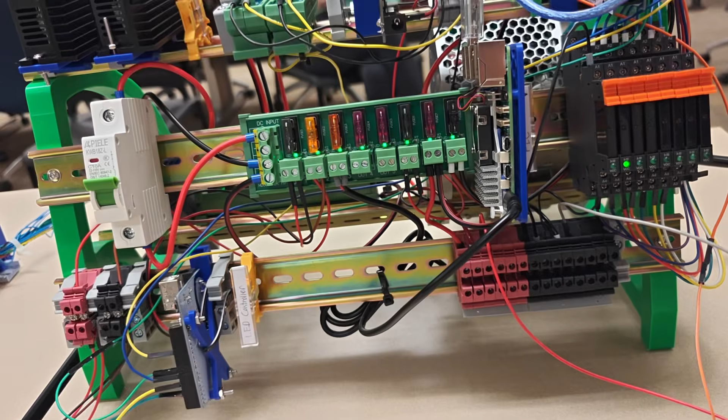We are the controls engineering team for the Themed Entertainment Association at Notre Dame, presenting Thunderbird's Tempest, a fully functional ride and show control system. This project utilizes real industry software and programming languages to safely control a swinging pirate ship-style model theme park ride, which will soon be ready to construct.

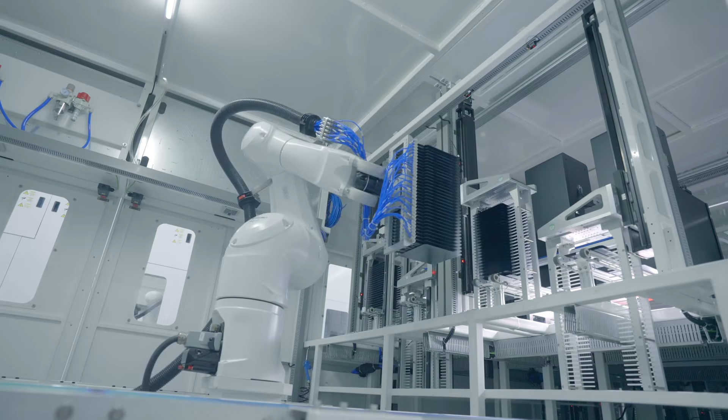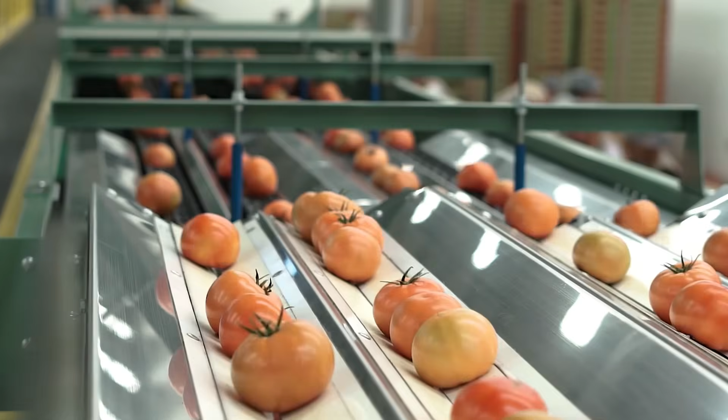A PLC, or Programmable Logic Controller, is a rugged industrial computer designed to control machines. They were first developed in the late 1960s to replace massive relay-based control systems in factories, making automation faster, more flexible, and easier to modify. PLCs run almost any industrial process you can think of, but over time, their ability to run continuously for years led to their adoption within the theme park industry as well.

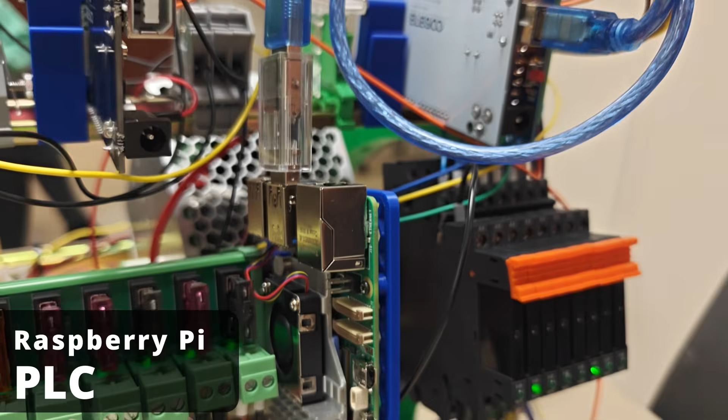However, building control systems with traditional industrial hardware can be extremely expensive. A single PLC can cost thousands of dollars, with I/O modules adding hundreds more per unit, and software licenses for major manufacturers often costing several thousand dollars on top of that. So for our project, we set out to recreate that same industrial control architecture, but with more accessible hardware and software. Instead of a traditional PLC, we use a Raspberry Pi as the main controller, supported by Arduino microcontrollers handling distributed I/O. Using affordable components, we're still able to implement the same core structure used in real industrial systems.

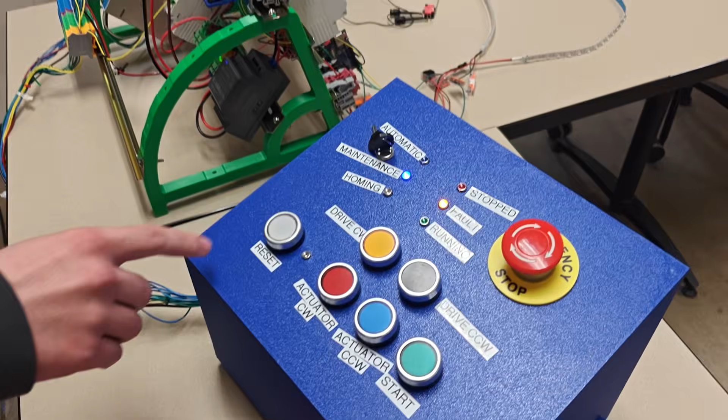In our setup, sensors, buttons, and actuators exist out in the field, interacting directly with the physical ride system and the ride operator. The Raspberry Pi acts as the PLC, processing inputs and making real-time control decisions. And on top of that, our SCADA HMI provides a live bird's-eye view of the entire control system, allowing operators to monitor system states, respond to alarms, and control the ride from any device.

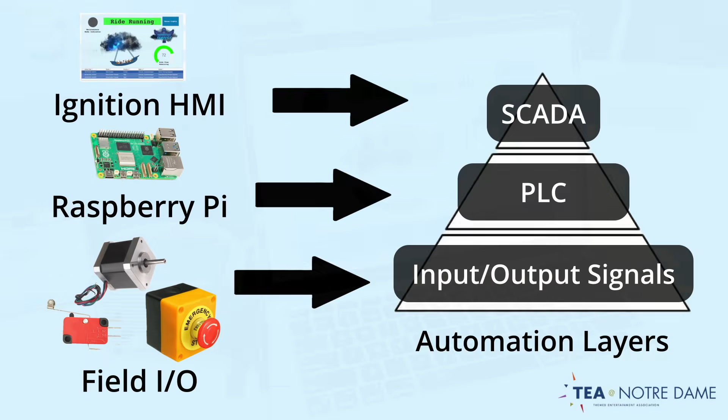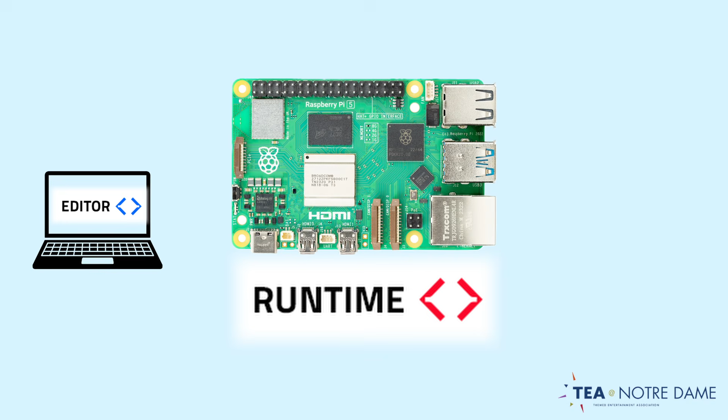To program the control system, we wanted to stay as close as possible to real industrial standards by using the official IEC 61131-3 PLC languages. We achieved this by using the open source platform OpenPLC. Development was done using the OpenPLC editor on our laptops, while the OpenPLC runtime was deployed on the Raspberry Pi to execute the compiled control logic. OpenPLC provides all the primary features found in most brand name PLC editors, like live debugging, while also being able to handle function blocks with all 5 official PLC languages, as well as Python and C++.

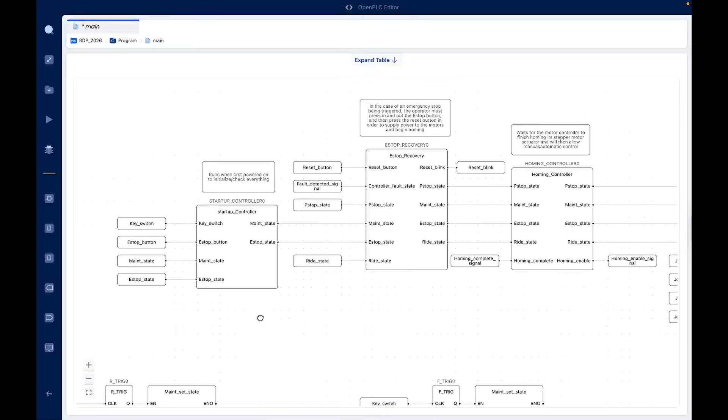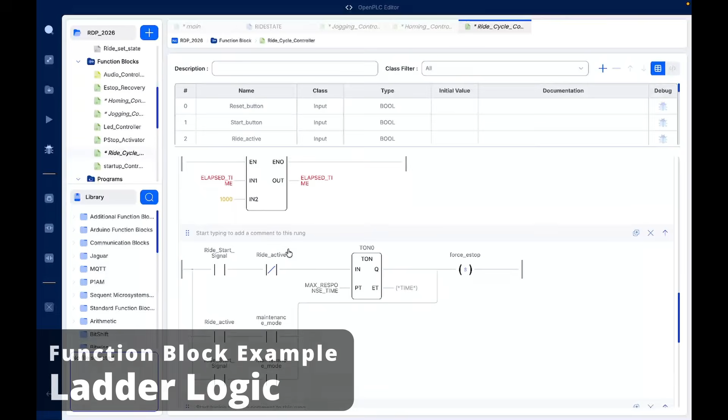At the center of our system is this function block diagram, which provides a high-level visual representation of how the ride operates. All of the core function blocks within this diagram are written in traditional PLC ladder logic. We use custom user-defined data types to represent the state of the ride, such as stopped, waiting, or running, and trigger these state changes based on the sequence of Boolean logic in the ladder diagrams.

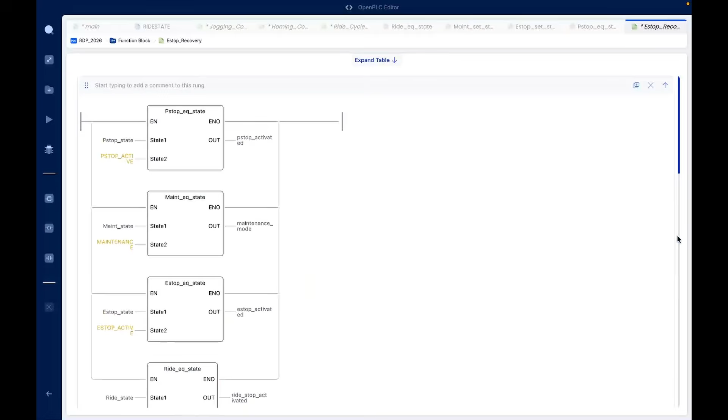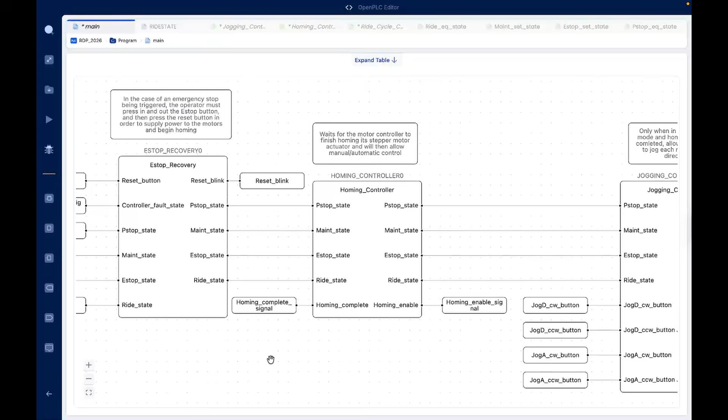For more advanced operations limited by ladder logic, such as changing the state of our ride, we utilize functions written in structured text. Altogether, this system manages key ride behaviors, including emergency stop recovery, stepper motor homing, manual motor jogging, and controlling a full ride cycle with synchronized lighting and audio. To handle audio playback specifically, we also implemented a Python-based function block, which triggers different sounds to play over Bluetooth to a speaker.

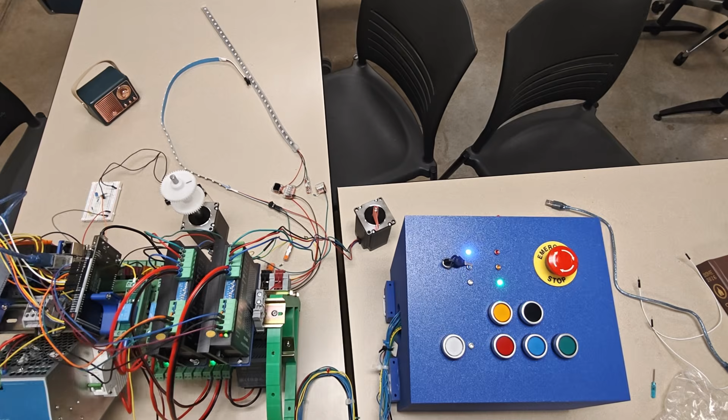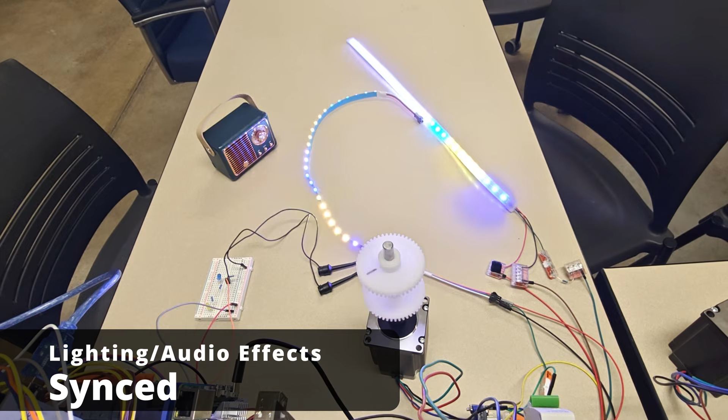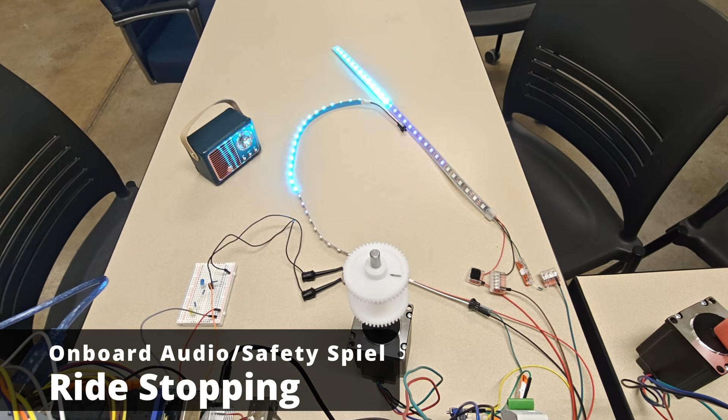Hold on tight, Storm Riders. Keep all hands, arms, and legs inside the vehicle at all times. Welcome back to Solid Ground, Storm Riders. We hope you survived the Tempest! Attention, Storm Riders. It seems Thunderbird needs a moment to recharge. Please remain seated, keep your lap bars down, and hold.

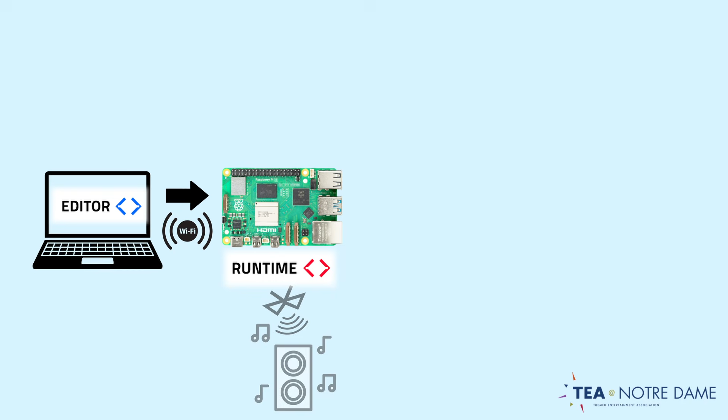To expand beyond the limited I/O available on the Raspberry Pi, we integrated an Arduino Mega as a Modbus RTU slave device. This allows the system to communicate over a USB cable and effectively extend the number of inputs and outputs available to the control system. This remote I/O layer is responsible for interfacing directly with the physical system. It receives inputs from buttons on the operator panel, limit switch signals, and feedback signals from the motor and LED controllers, sending that data back to the Raspberry Pi for processing.

Based on this input, the OpenPLC runtime sends commands back through the Arduino to activate relays for our operator button panel LEDs, our e-stop motor driver power circuit relays, and signal to our motor controller and LED controller what PWM signals to send to the stepper motors or LED strips.

To create a web-based user interface for our control system, we configured an OPC UA server within the OpenPLC runtime. OPC UA is a widely used industrial communication protocol that allows different systems to securely share real-time data. Through this server, we exposed important tags from our PLC logic, such as the current ride state and the remaining time left in a ride cycle. To build our HMI, or human-machine interface, we used the free Maker edition of Ignition by Inductive Automation, which functions as a full SCADA platform for monitoring and controlling industrial systems.

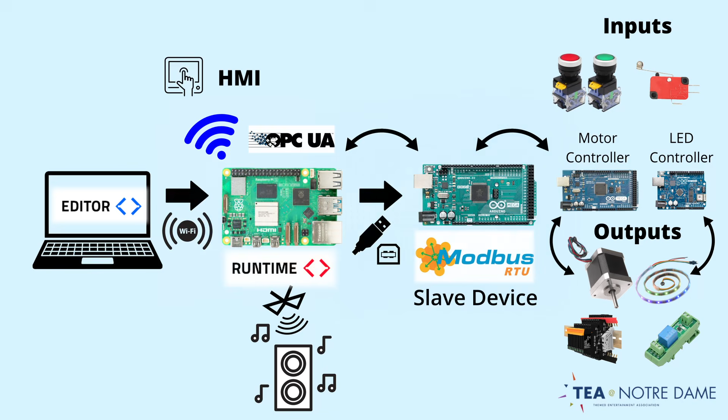We set up an Ignition gateway on a separate computer and established an OPC UA client connection to the Raspberry Pi by specifying the OpenPLC runtime's IP address and port number. Once connected, all exposed PLC tags became available within Ignition, allowing us to monitor and interact with those variables in real time. Using the Ignition Designer, we developed a fully customized web-based HMI, and because it runs in a browser, the interface can be accessed from any device on the same network. The HMI displays key system information, such as the ride's current state and whether it is in maintenance mode.

It also allows operators to write values back to the PLC. For example, toggling house lights on and off. We leveraged browser-based rendering and custom CSS with Ignition style classes to create animations. This includes a rotating pirate ship and animated storm clouds. These visual elements are triggered by linking tags to certain properties and creating a transformation, like this one that displays the ride state and changes the background color based on the tag's value.

In some cases, we used Ignition's Python scripting to link certain events, such as mouse triggers, to reading and writing new tag data. An alarms table was also created along the bottom of the HMI, which provides operators and maintenance teams with a timestamp, an alarm priority, and suggestions on how to clear the alarm, as well as the ability to acknowledge or shelve recurring alarms.

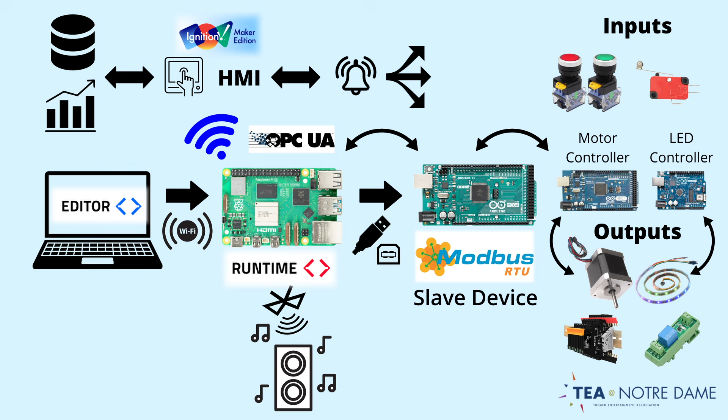For example, the emergency stop button is configured as a high priority alarm, requiring a defined recovery process before operation can resume. More severe system faults are classified as critical alarms and indicate that actions such as motor rehoming are required. Looking forward, this system can be expanded by integrating a database to log long-term system data and trends. Ignition also supports alarm pipelines, enabling notifications to be sent to operators or maintenance teams via platforms like Slack, email, or SMS. Now onto a closer look at the electrical system.

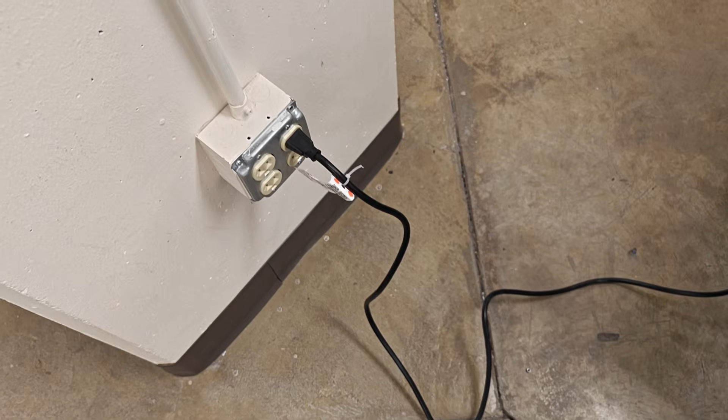All components were mounted on DIN rail, which is a standardized industrial mounting bar used in most electrical cabinets. Our control system needs to power mostly 5-volt devices such as our Raspberry Pi and Arduinos, but also needs to power two 24-volt stepper motors. To distribute this properly, we start with taking 120-volt AC from a wall outlet into an extension cord and connect this to our AC to DC 24-volt 20-amp power supply.

That power supply's 24-volt output is connected to a power distribution fuse block, which branches off to our two 24-volt stepper motors, as well as a 24-volt to 5-volt 10.8-amp DC to DC converter. The 5 volts then branch off to another power distribution fuse block, which powers our Raspberry Pi, 3 Arduino microcontrollers, LED strips, and our operator button panel indicator lights.

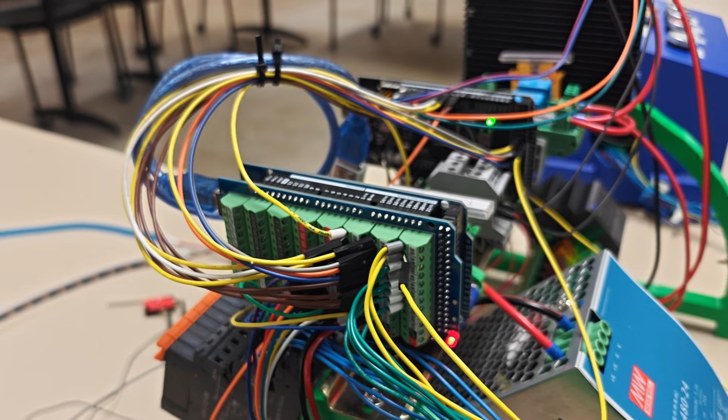One of the Arduinos acts as a Modbus RTU remote I/O slave device connected to the Raspberry Pi PLC through a power blocking USB port. This Arduino effectively expands the available GPIO of the Raspberry Pi, which it uses to send commands to the 2 other Arduinos. One of these other Arduinos acts as the stepper motor controller, creating PWM signals that would be impossible to create with the 20 millisecond cycle time of our PLC.

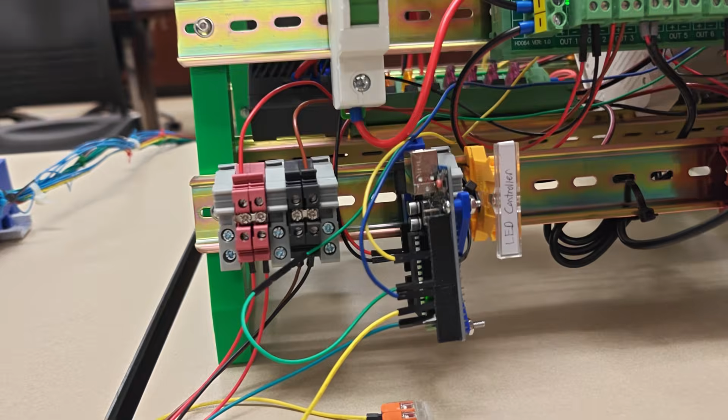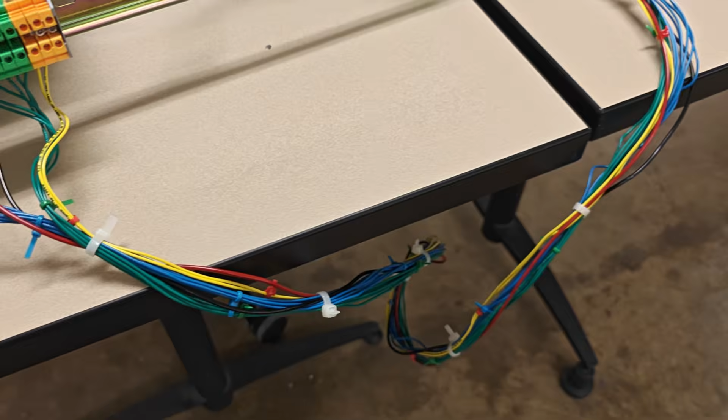The third Arduino acts as our LED strip controller, similarly handling complex PWM signals based on the states set by the PLC. The remote I/O Arduino handles receiving signals from the 6 push buttons, 1 emergency stop button, and maintenance key switch from the operator panel. It also sends signals to turn on and off the 7 indicator lights.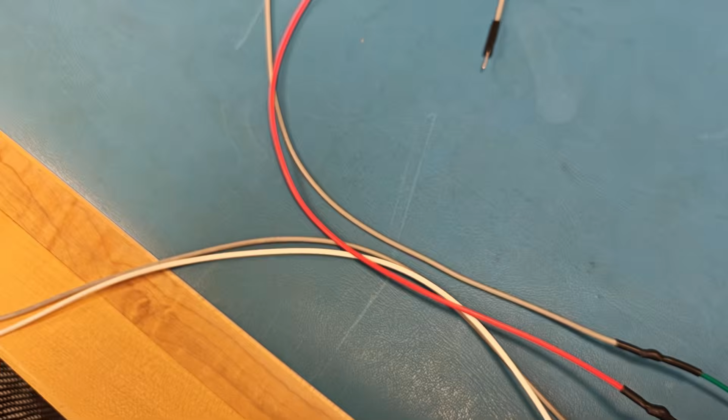Directly connecting these industrial indicator lights would exceed the current capacity of the remote I/O Arduino GPIO pins, so we use a set of solid-state relays to open and close the individual LED circuits from a separate 5-volt power branch. The most critical part of the system is the emergency stop circuit. The ride uses one stepper motor to drive the pirate ship itself, while a second actuator motor physically moves the drive wheel into and out of contact with the ride.

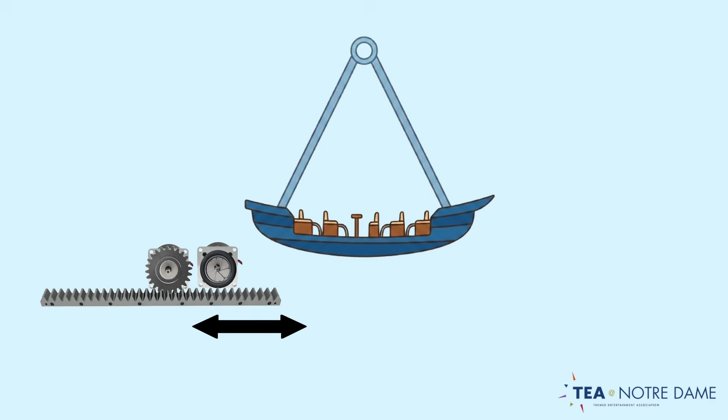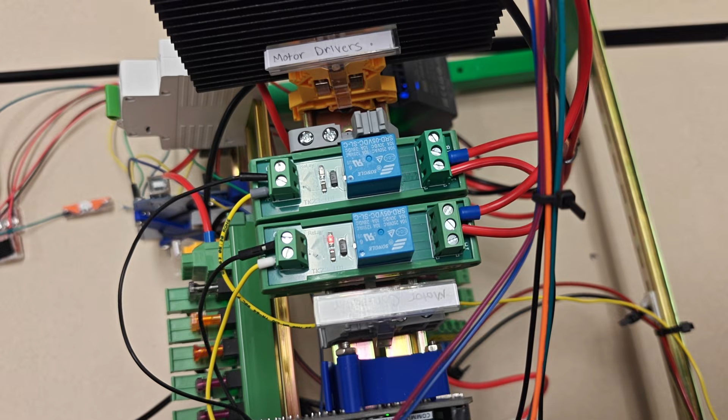In the event of an emergency stop, power must be immediately removed from the drive motor, while the actuator motor retracts the drive wheel, allowing the ride to safely coast to a stop. The action of cutting power from the drive stepper motor is handled by these two electromechanical relays. They are placed in series, so power has to pass through both of them in order to allow the drive motor to turn on. Our physical e-stop button is hardwired directly into one of these relay modules, as well as the PLC itself. The second relay is controlled by the PLC through what we call the program stop output.

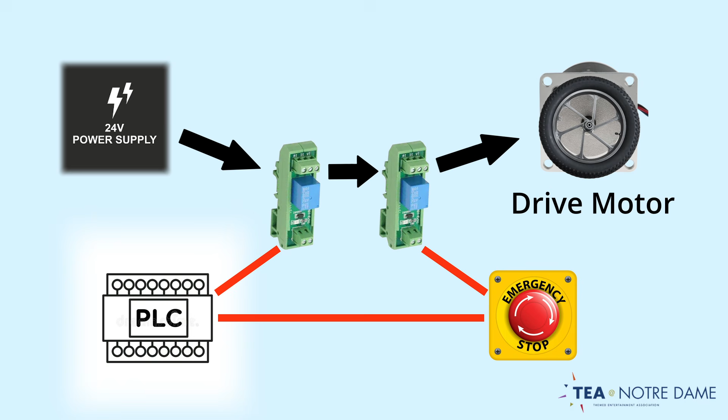This architecture gives both the operator and the PLC independent authority to disable the drive motor and stop the ride. It also allows the system to enforce a controlled recovery procedure before the ride can resume operation. After an emergency stop occurs, whether triggered by the operator or by a detected system fault, the ride must first be placed into maintenance mode by maintenance personnel. They are then required to cycle the physical emergency stop button in and out to verify the correct functionality and detection of the e-stop button.

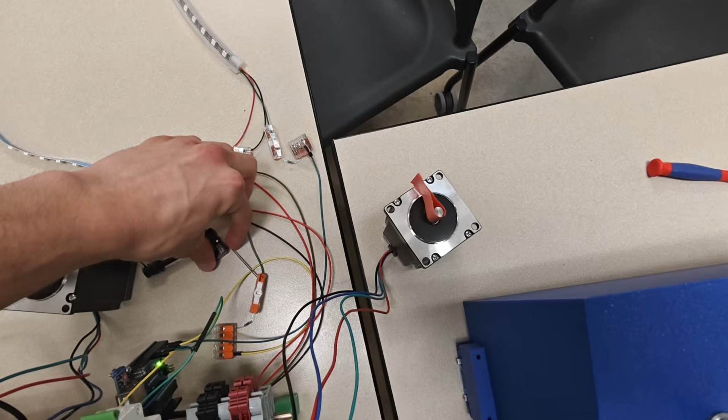Once this is complete, the reset button can be pressed, which initiates the actuator motor homing sequence. Once the actuator reaches its limit switch and confirms the correct position, the PLC releases the program stop relay and allows the ride to be switched back into automatic operation. If another emergency stop occurs, the entire recovery process must be repeated before operation can continue.

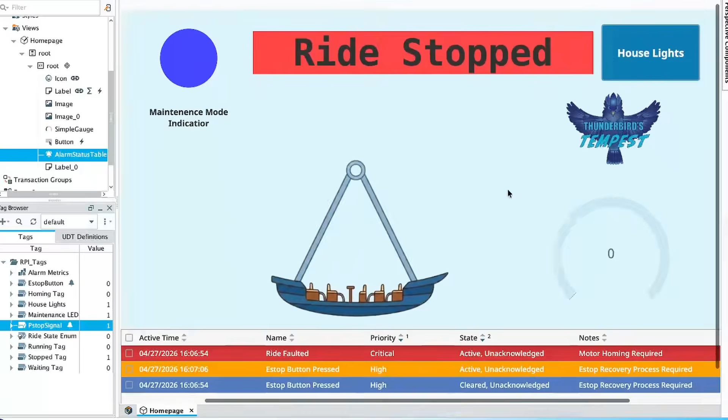At this stage, the Thunderbird's Tempest control system is fully operational and ready to be integrated into the actual ride once mechanical construction is complete. Throughout this project, we learned a tremendous amount about the software and hardware tools used in real ride control systems, and we hope this project helped introduce some of those technologies to you as well.